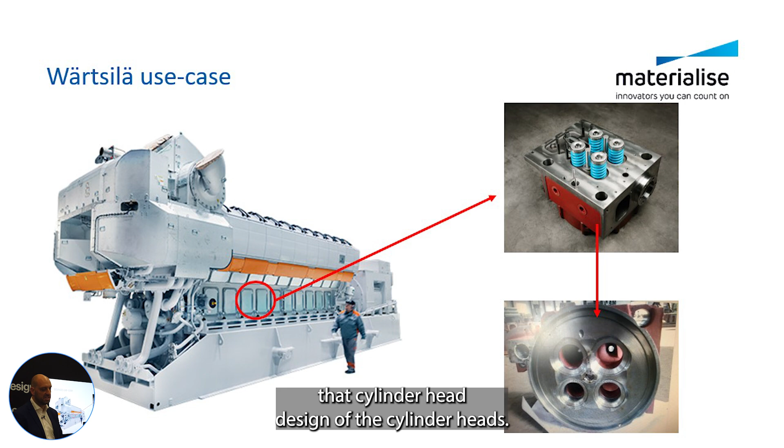So what I wanted to do is basically simplify and also optimize that cylinder head, the design of the cylinder heads. But as you all are using nTop and Magics as well, they run into limitations, of course.

They had this fancy, complex design that they had created in nTop, but meshing it took many, many hours, let's say it like this. But importing in Magics was near impossible. It took days. And we're not talking about slicing yet. Slicing was just impossible. As you're nodding, you know for sure what I'm talking about.

So now we sat down together and said, how can we solve this? They had this awesome new thing called the nTop kernel. We had a problem statement that we needed to solve. So we said, let's work together, let's solve this together. And we had this nice collaboration between nTop and Materialise, making sure that you can have that end-to-end design-to-manufacturing workflow.

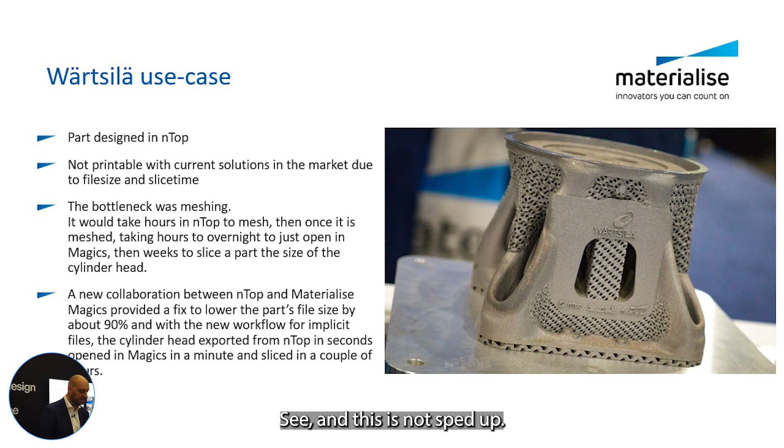Now, how does it look like? Because it's really interesting to see. And this is not sped up. This is really nice to see, except the slicing part, I took that out. Otherwise it will take too long.

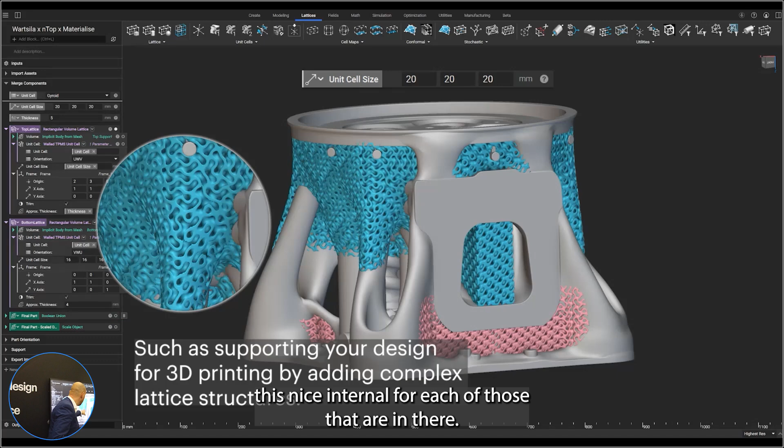Here we see the part being designed in nTop, and the increased complexity when it comes down to all the possibilities that nTop offers you. You see there the creation of the gyroids for the heat dissipation. You have these nice internal cooling channels that are in there.

Now, to export this from nTop, this took hours. I don't know exactly how many hours it took. It was near impossible. We gave up at a certain point in time just for the benchmarking purposes. But what you see here, exporting natively the .implicit file, took only 19 seconds.

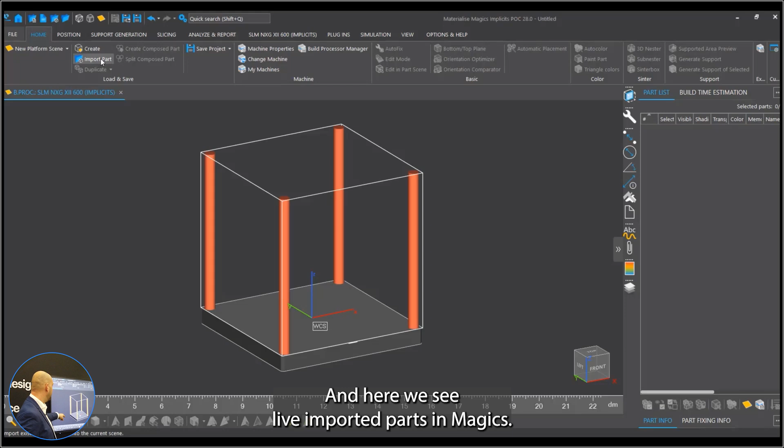And here you see live the import part in Magics, natively implicit in Magics itself. This is really nice to see. You can actually set your rendering properties. So what you see here, you import the part itself in Magics, and you already have a full part in Magics itself.

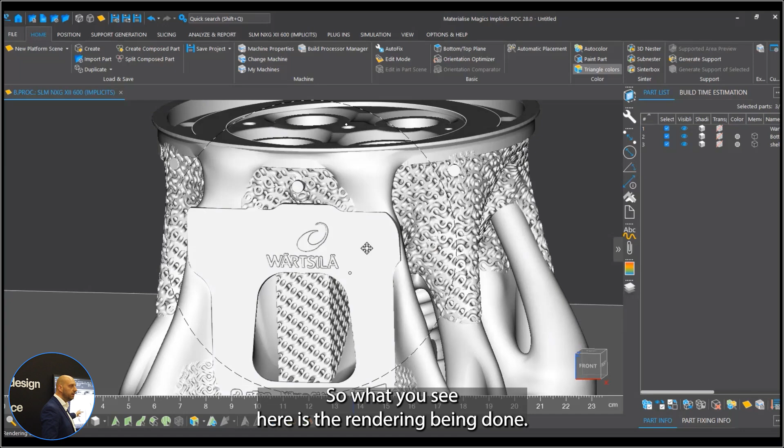What you see here is actually the rendering being done. We offer a low polygon way of working, and the rendering is being done in the background. So you already can use Magics on the fly with the full part and do all your work.

Now, we enable almost full build-up capabilities in Magics. So here you see, for example, labeling on the implicit part itself, where you can actually start doing all the things needed on the implicit parts.

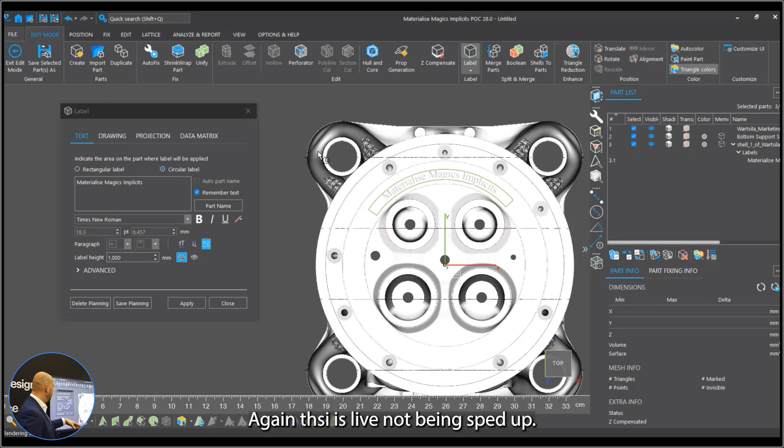Again, this is live, this is not being sped up, this is just as it goes. You apply this, then you can step further, you can inspect everything. And again, this is being done on the .implicit file.

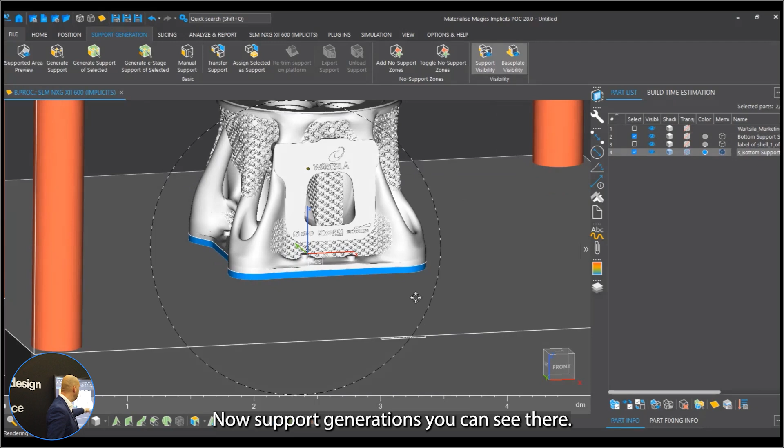After this, you can do your support generation. You can code everything as well, but you can really make sure that everything is disconnected from each other, and also do your print analysis. This is really something important. You can check your Z height, you can do your measurements, you can check your gyroids, you can do your thin wall analysis and so on.

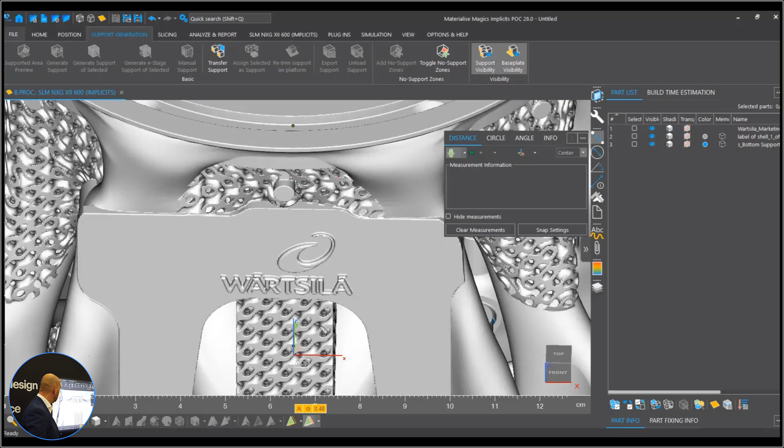So this is all based on the functionality of Magics. Again, this is on the fly, not sped up.

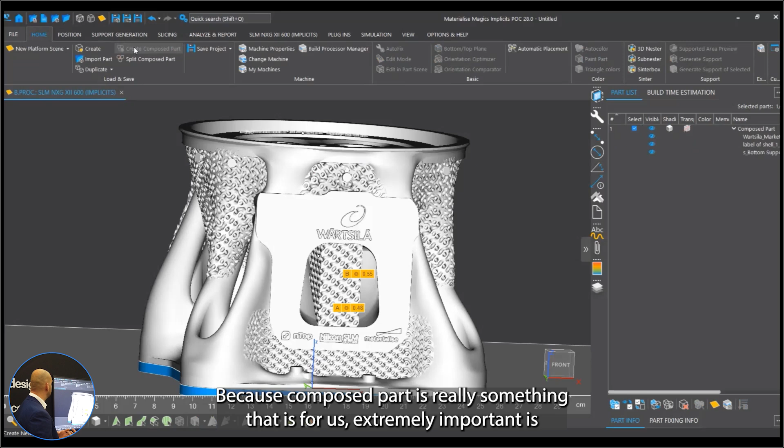Afterwards, when you go to the printing stage, you can create a composed part out of this, and we'll definitely come back to that later, because the composed part is really something that is extremely important for us. It's making sure that you can combine all your technologies or geometries that you're using to create your part.

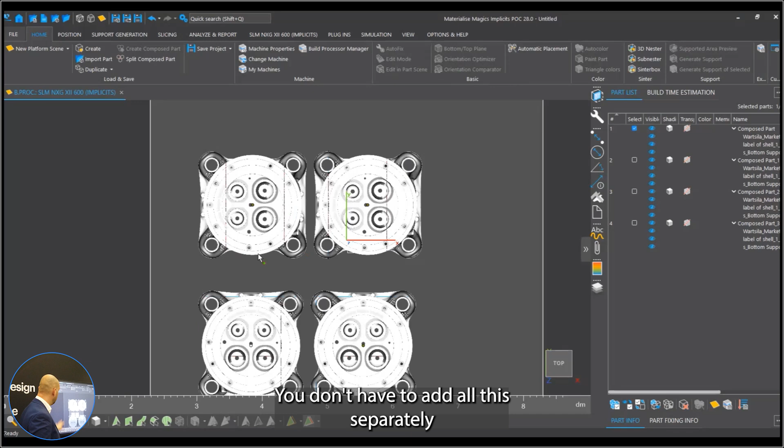And create it in one manufacturable part. How many you need doesn't matter, you can just copy them, create virtual copies. You don't have to add all these parts separately. Again, do the checks, and then go to slice.

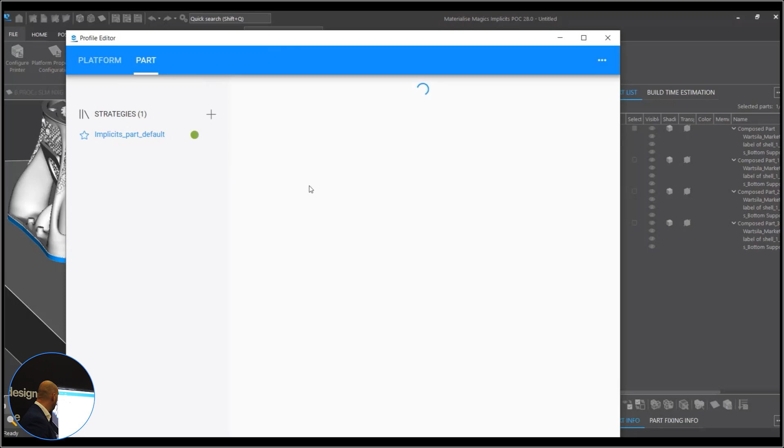Now, this entire workflow went from unprintable to imported in 19 seconds, actionable in Magics in under a minute, and sliced in a matter of hours. So it went from an unprintable part to a sliced part in a matter of hours, and this is also by the power of the new next-gen build processor that we now have.

With the next-gen build processor, we also fully support the nTop kernel. You can slice without converting to a mesh, natively on the implicit level. You can set your strategies based on every part, so if you want build strategies on a different level, that's also possible.

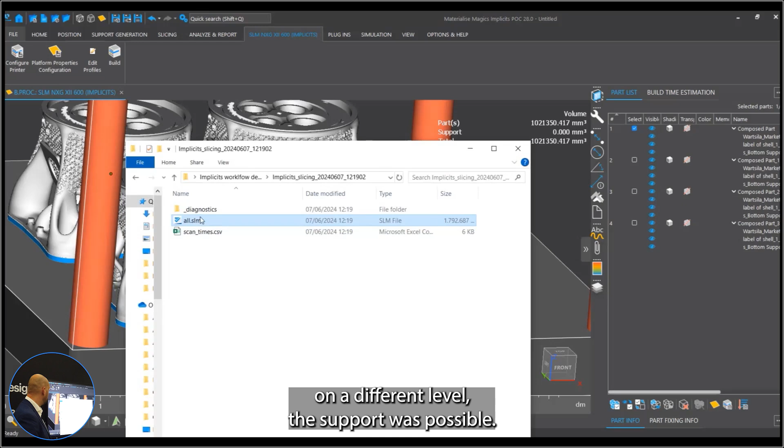And afterwards, once it's been sliced, you can definitely check on slice level via Inspector if you want to see if your gyroids are connecting well, if everything's going well, if your walls are loose or not. So this is a very powerful end-to-end workflow based on Magics and nTop.

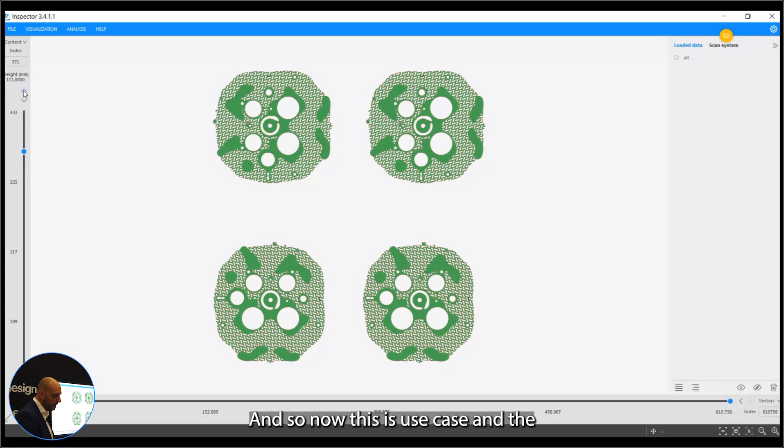Now, this is a use case, the part is over there, you can definitely check it out. But this is not the end.

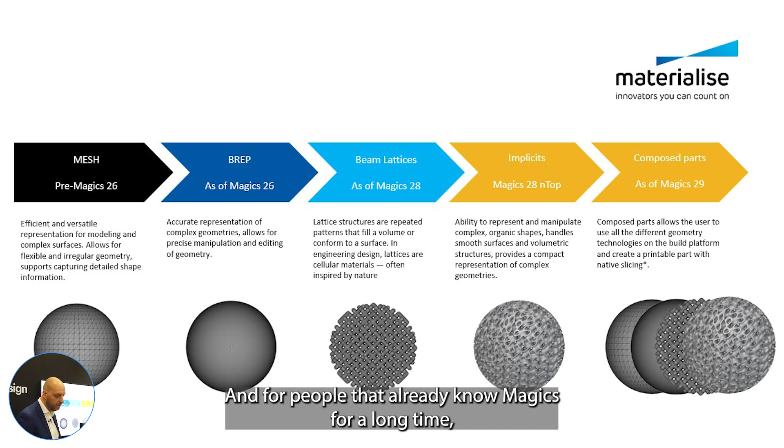What I said is the composed part is really important. For people that already know Magics for a long time, we have taken quite some route and journey. Everything pre-Magics 26 was mesh only, and this is where the problem started. nTop challenged us many times here, like clean up your meshes, and other stuff like this. So we heard all of you.

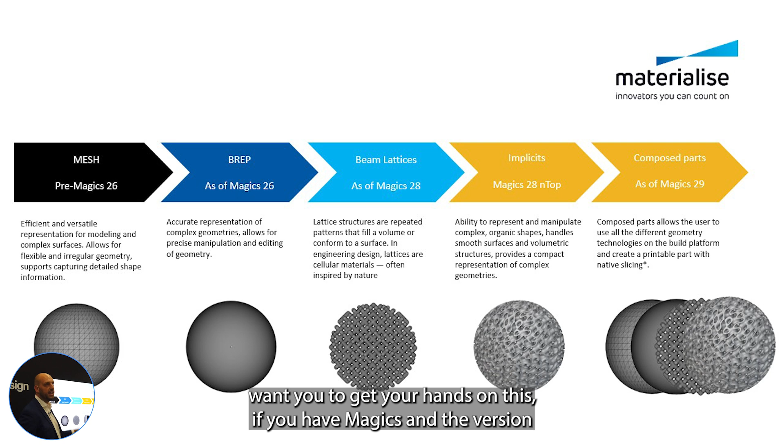As of Magics 26, we introduced the BREP functionality with a partnership with Siemens. And with Magics 28, what we're now doing is an early validation program. So any of you wanting to get your hands on this, we have a Magics 28 version that is nTop capable, capable of printing those implicit files.

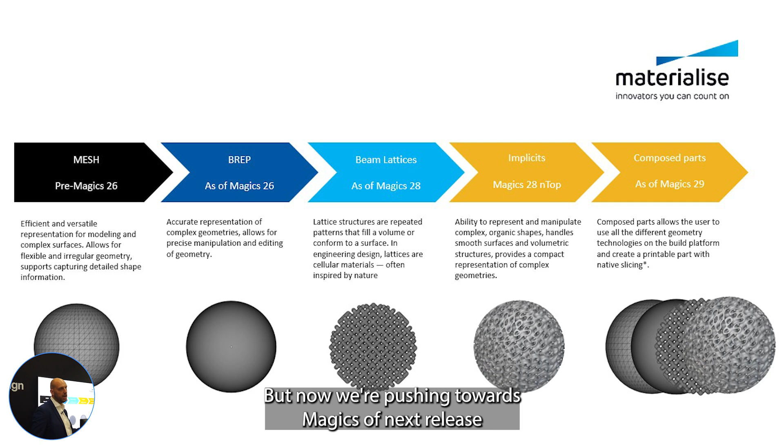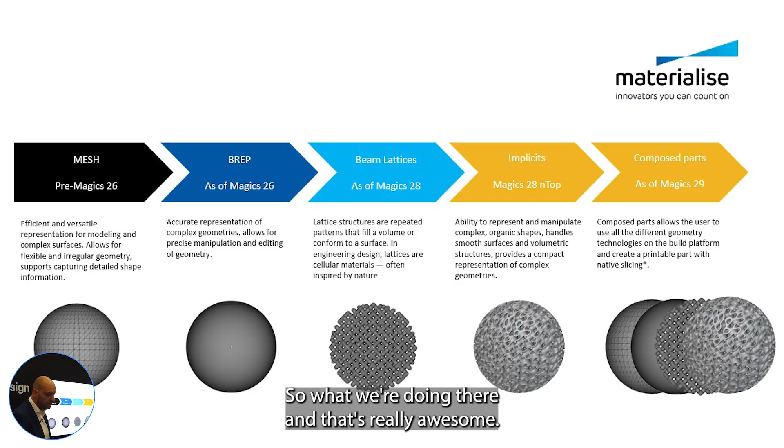Later on, what we're now pushing towards in Magics, our next release, with the beta coming out on February 14th, release May 25th or 15th, we do composed parts. What we're doing there, and that's really awesome, is we're pushing all those technologies onto the build platform.

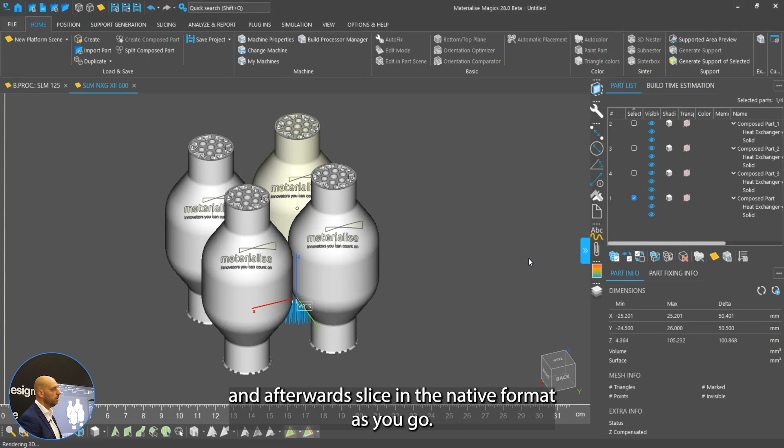So it doesn't matter if you're working in mesh, BREP, implicit, support generation, or whatever you're using, you will now be able in Magics 29 to use all those geometries natively in build prep to do your build preparation. Afterwards, you slice in the native format as you go—meshes slice natively in meshes, implicits slice natively as implicits—and you can make a composed part out of outer hull, implicits, supports, and so on.

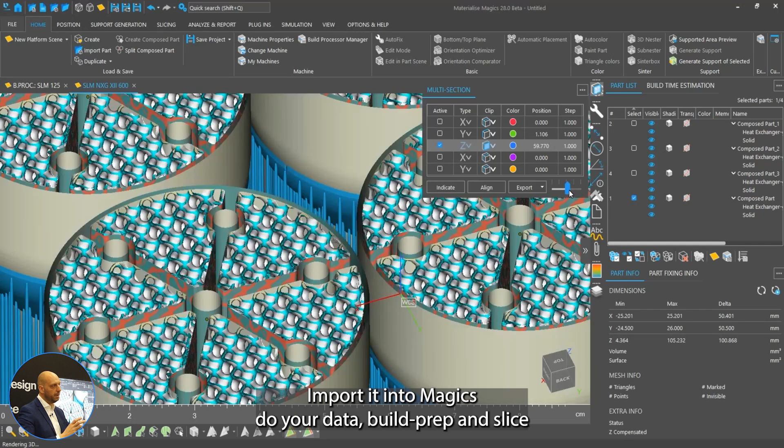And this is really the power of this collaboration: having those manufacturable parts, being able to design, import in Magics, do your data, build prep, and slice, all natively end-to-end. So this is how the workflow looks like.